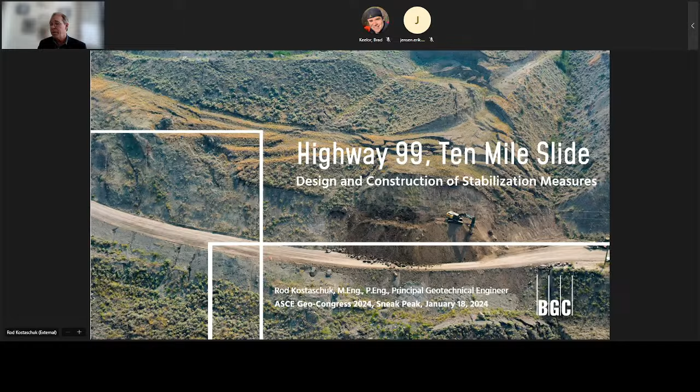Just an outline of what I'll talk about here: some background on the slide and the site, what we did for investigation and geotechnical assessments, then a little bit on the concept selection phase, why we chose the concepts we did, some details on the design and analyses done for the measures, and then the fun stuff - construction, some good photos and graphics to look at, and then results, basically as measured by geotechnical instrumentation.

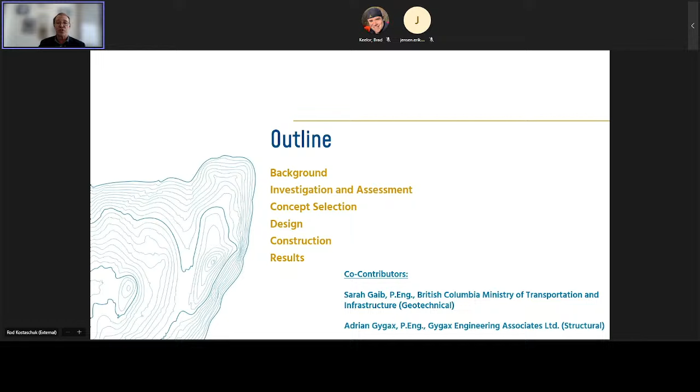Okay, so project location now. On the left-hand side, you see most of our beautiful continent. The red dot is the project location there in the province of British Columbia, southwest corner, Canada. And in the extreme southwest corner, not shown on the map, that's where you'll be for Geo-Congress coming up. A little bit closer view on the right-hand side here. You can see, I'll point to Vancouver down here on the coast, and it's about a 4-hour drive inland to the town of Lillooet, which is close to where the slide is.

On the map, you can see that from Lillooet, the most direct connection to the interior, to the city of Kamloops, which is the regional center with hospitals and all that stuff, is through Highway 99, where the slide is located.

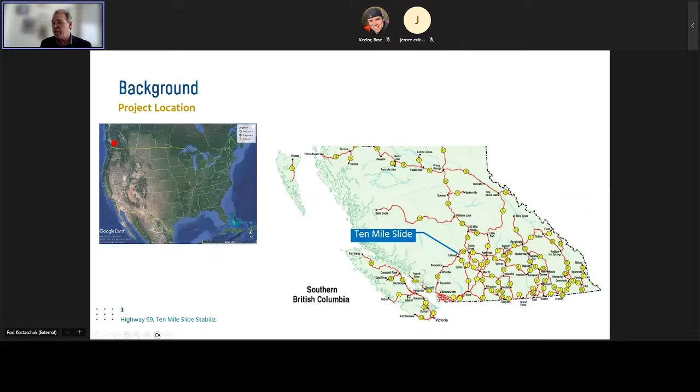Okay, so a bit more on the background. This picture on the right-hand side shows first of all the tunnel earthflow outlined in the purple line, which is a 1.5 kilometer long and approximately 13 million cubic meter earth flow. Essentially, as the mountaintops degrade in this area and the material is weathered and altered, it falls down the slopes, forming this very long soil glacier, fairly steep, moving very, very little, but it has that shape.

Down near the bottom of it, right at the bottom is the Fraser River, which you'll see better in other pictures. The blue line is Highway 99, and above that, the dashed line is the CN Rail line. Both go through this red outline showing the extent of the active 10-mile slide. That slide is about 200 meters wide, about 1 million cubic meters of earth. It's located on Xaxli'p First Nation territory, just east of Lillooet. The basal shear zone, the bottom of the sliding mass, is around 18 meters on average at the highway.

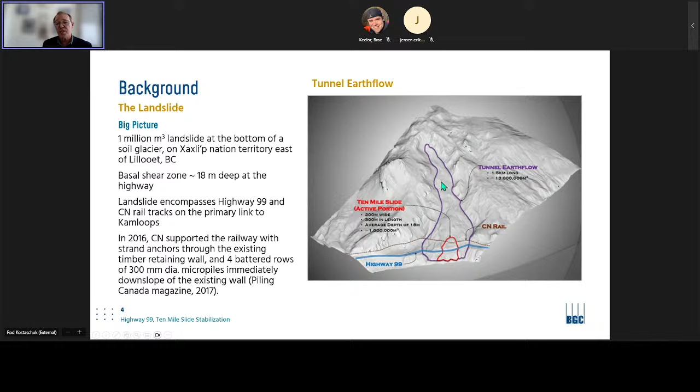This is basically the picture that was at the beginning. Here is a photo from 2015 of the highway - you can see it's a dirt road highway. In the left middle you can see some large tension cracks and movement. The excavator is working to remove material pushed out over the highway during one of the highway closures, working to both widen the road and straighten it out so traffic can resume. In this picture, the highway is closed and traffic is being diverted the long way. At the top right, you can see the timber retaining wall, where the stabilization measures by CN were constructed.

So the slope is above the Fraser River, quite a steep slope. The slide's been active since 1988, and it moves all the time - 5 to 25 millimeters every day - slowing down during dry periods and moving faster during precipitation events or snowmelt events.

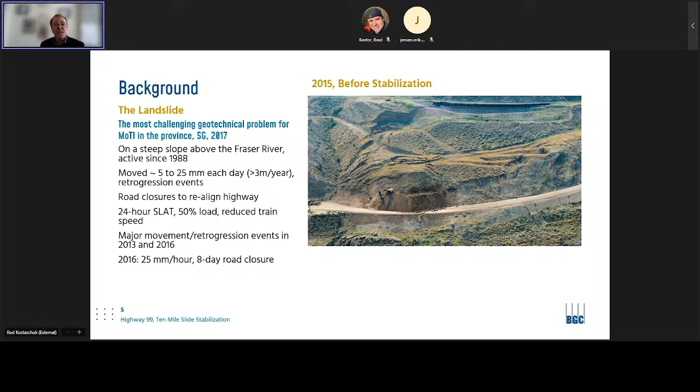There have been road closures to realign the highway a few times over the period it's been active. In recent years, that's caused single lane alternating traffic only to be allowed on the highway, and trains have had to slow down. The most recent major retrogression events were in 2013 and 2016, and in 2016 there was an 8-day road closure. So yeah, in fact, things are so bad in Lillooet, even the highway leaving town is leaving town.

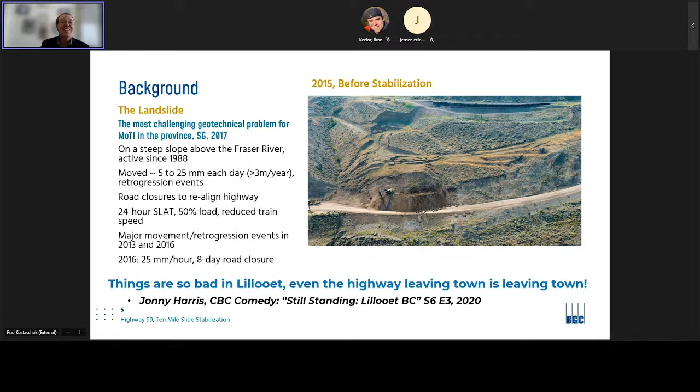How fast has the landslide been leaving town? This is a good illustration here on the right-hand side. In 1984, you have this very small scarp appeared down the slope—the yellow outline is the active slide, Fraser River down here, down slope on the right. It retrogressed upslope 4 years later to get very close to the highway, then continued to retrogress, with the slide getting progressively wider as well, moving up the slope in 90, 96, 2007, 2009, 2015.

These red lines are largely based on LiDAR change detection assessment, trying to indicate all the ground that's moving at the time of the LiDAR shots. You can also see on this illustration a number of geotechnical boreholes. On the highway, these little orange rectangles are cutter soil mixing shear panels that were attempted in 2011—I'll talk more about that in a bit. And the vectors you see are the movement direction for the slide, moving downslope.

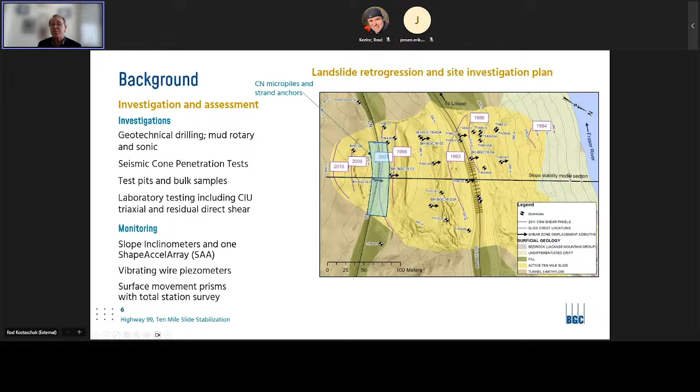What did the investigation and assessment of the slide determine? We have this tunnel earthflow, this kind of soil glacier feature. It's low plastic, firm to stiff, well-graded clay, silt, sand and gravel, but also has cobbles and boulders, up to 5 meters in diameter. But these materials, the boulders and things, are not very durable—it's highly decomposed and altered and weathered rock in this earth flow, so those large particles were actually quite soft.

In contrast, below the earth flow are what we call the undifferentiated glacial sediments, essentially the very coarse river deposits created by the Fraser River, a very large river. That material was dense to very dense, well-graded sand and gravel, but also with significant content of cobbles and boulders, and these materials were very hard—granodiorite type materials, hard boulders. Across the site we could see that material had some quite sandy zones, but then again some very cobbly and bouldery zones, kind of as you'd expect in a dynamic river environment.

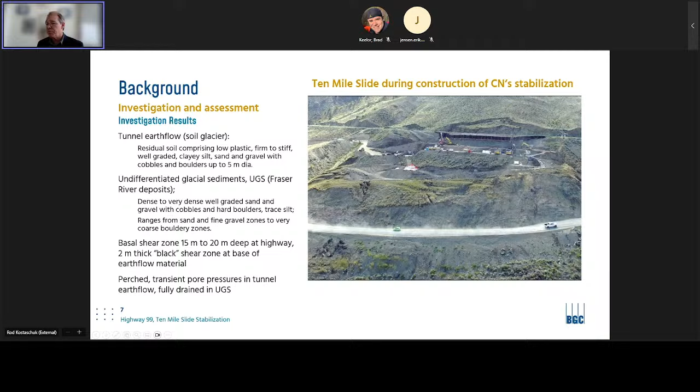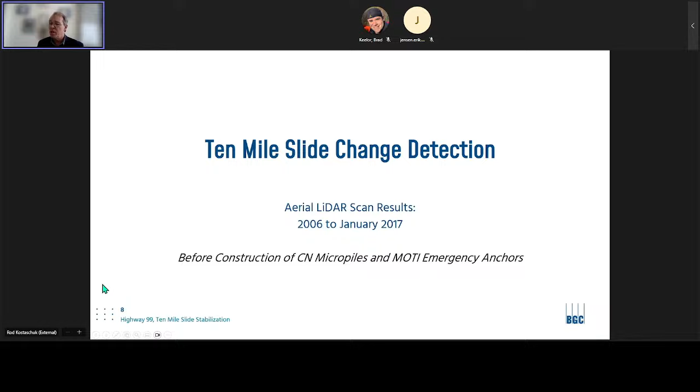Okay, so now to get a better idea what this thing looks like, we're going to look at some change detection analysis using aerial LiDAR scan results for an 11-year period prior to starting any of the stabilization works. This first picture shows the extent of the aerial LiDAR coverage, really the entire earth flow. You can see these lineations going up the earth flow to the top, to the source zone in the andesitic rocks, all this decomposing material. It's very steep, it falls down the slopes and accumulates in this gully.

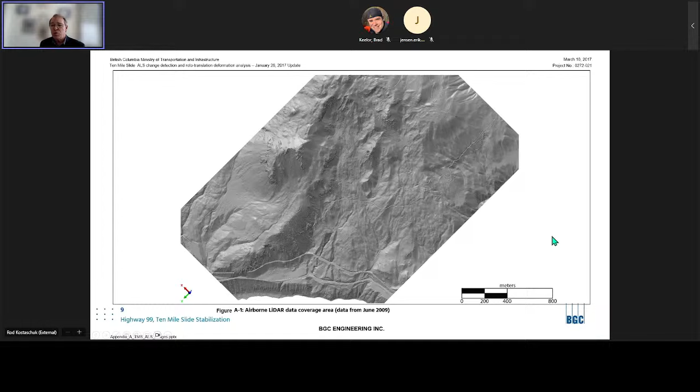Flowing down towards the CN Railway at the top, the highway below it, and right at the bottom, the Fraser River. The next pictures show an animation of LiDAR change detection. What we're seeing here is showing the change in the ground in the period between 2006 and 2009. The color coding here: blue is negative change, meaning the ground has dropped down or moved backwards from the view. A positive change in red is where the ground has bulged outwards or moved upwards in elevation.

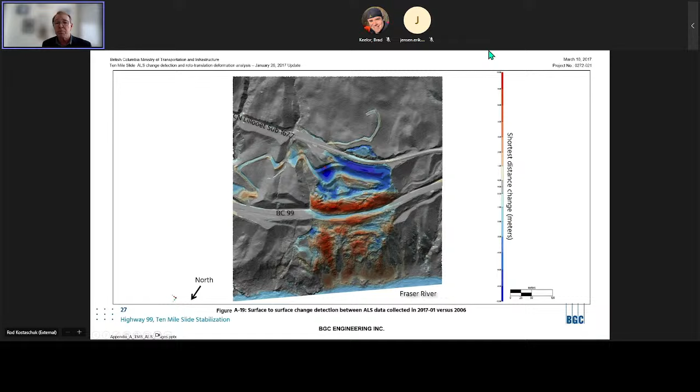Okay, so moving on, the picture on the right here is just a frontal view of the stabilization works at the end of construction. We'll talk a lot more about that coming up, but you can see in the picture the timber retaining wall of the highway and the headscarp well above it, and then the stabilization measures here with the hydro seeding.

So concept selection—what was feasible at this site? Of course you're trying to look for earthwork solutions, but that was not good; it's quite steep, unsafe downslope. You saw the material suddenly kind of slumping off into the Fraser River there. So constructing shear keys or a toe buttress is very challenging. Again, uphill of the slide, the earth flow continues upslope at a fairly steep angle.

Opportunities for unloading the crest are not good. And because there's not a lot of groundwater pressure, just some perched water tables, drainage measures aren't going to do a lot of good either. The site—you can kind of tell from the vegetation—is in a semi-desert climate, in the rain shadow of the coast mountains, so it's quite a dry site. And the undifferentiated glacial sediments are very free draining, so they drain the entire site.

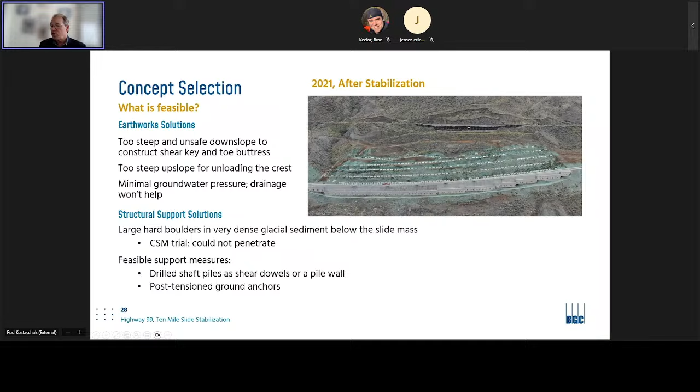So then the feasible support measures that were deemed possibilities were drilled shaft piles, either acting as shear dowels in a passive shear dowel type support, or as a pile wall. And the other measure found to be quite effective and good for this project was post-tension ground anchors. So that's how we got to the concepts we did.

Just a quick look at design criteria here—we wanted to improve the factor of safety, the geotechnical factor of safety for the landslide, by approximately 20%.

That target was based essentially on a lot of experience in the past, a lot of publications. You can improve the factor of safety by that much and really get to a state where you're not going to see much movement. And that's really the basis for that criteria - a minimum service life of 30 years.

If the slide were to continue to retrogress, the current measures wouldn't be enough. So there's a consideration that the design life may be based on landslide retrogression. The structure should be good for up to 75 years.

Limit States design methodology was used. We followed the Canadian Highway Bridge Design Code for our design criteria for retaining walls, including the 475-year earthquake. We also designed for the eventual, inevitable loss of all the soil above those dense glacial sediments.

Downhill of the pile wall, there was no reason to believe that things wouldn't just continue to move. So we designed for that.

But one of the biggest challenges, as I mentioned earlier, was that the ground is moving all the time. There's really no day where it doesn't move at least a little bit.

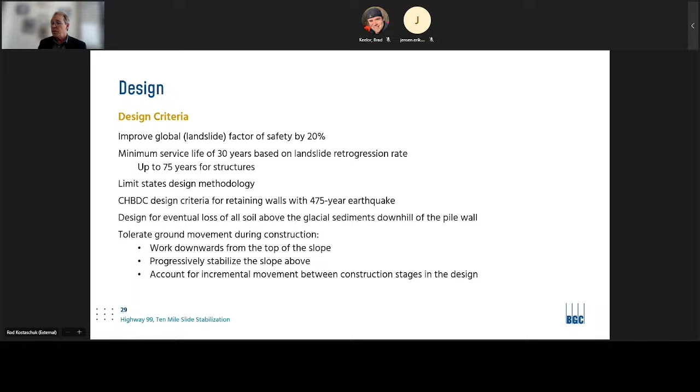So what does it look like? There's a typical cross section here on the right, and you can see the yellowy material - that's the tunnel Earthflow. The shear zone is highlighted in gray, approximately 2 meters thick. At the bottom of the geologic cross section are the undifferentiated glacial sediments, shown with the cobbly, bouldery symbol. Up at the top of the picture, you can see the CN rail line right at the top of the section.

We start at the top, quite close to where CN built their stabilization measures, and start building rows of anchors. From the top down, we ended up with 5 rows of anchors, each requiring a little bit of excavation to build the temporary working platform as we came down the slope, getting down to existing highway grade with the lowest row of anchors essentially at the final highway grade.

Once all that's in place, we went ahead and constructed the pile wall down here - piles first, followed by the anchors, and finally the pile cap and retaining wall built on top of the piles. Then finally the backfill is placed behind all of that.

There's also shown in white here a temporary expanded polystyrene fill wall. You can see the shape of it there, vertical on the front side, and that was built for a temporary traffic detour. So traffic was up there, driving on a single lane, but down here on top of the yellow material was the working platform for the piles on the downhill side of that EPS.

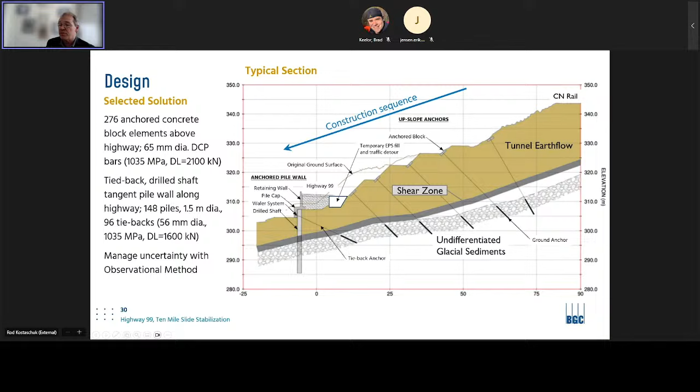So to tolerate the ground movement during construction, how did we go about doing that? Upslope of the highway, those anchored blocks are pretty easy - the anchor heads have grease-filled caps, so these anchors can be readjusted.

They can be tensioned higher, or back off the load on them, whatever you need to do. We have 5 or 6 load cells on each row of anchors to see how things are going and make decisions on whether we need to adjust anything.

And that is sandwiched in a triplet configuration between two concrete piles. These do not have a permanent steel shell. They use temporary steel casing to construct the pile that is removed.

And then, as I mentioned, 2 out of 3 piles have a tieback anchor. Those go through the concrete piles, not through the steel shell. And then a beam is constructed over the top, initially a steel waler, and eventually a concrete beam to tie

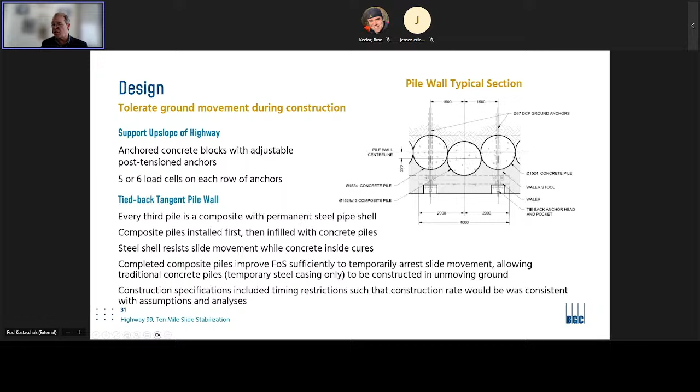Essentially, we started out by back analyzing the landslide prior to any construction work, as well as some local cut slopes, to calibrate our material parameters.

And then once we had that sorted out, we were able to incorporate the piles, the forces from the piles and the anchors into the limit equilibrium model. That allowed us to do initial sizing of the piles, anchors, et cetera.

And again, the design objective was to improve the static factor of safety by approximately 20% above the existing factor of safety. For seismic loading, we also did pseudostatic analysis to confirm that our resulting pseudostatic factor of safety was acceptable.

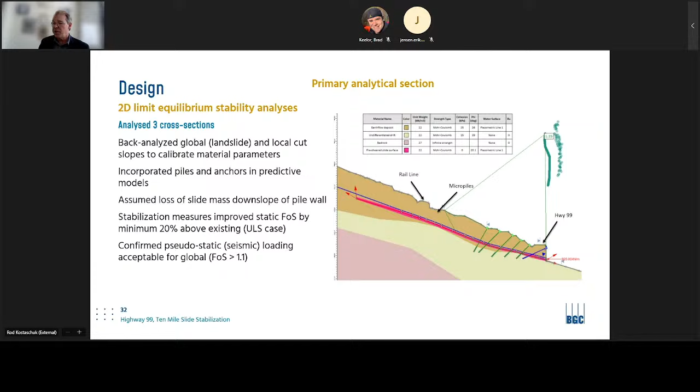But with a simplified limit equilibrium approach, it's really difficult to determine what will be the relative distribution of all of these ground earth loads on the structures.

They're not all built at the same time. The ground is moving while you're constructing. So hence we developed a full 2D numerical model to evaluate the construction sequence, as well as the final configuration under static and seismic loading.

And while that's going on, it's a dynamic model, and you're keeping the ground moving such that if it takes, for example, 2 months to build a row of anchors, then before you build the next row of anchors in the model, you allow the ground to move the equivalent of 2 months of ground movement, and then you build the next row of anchors.

So that's the displacement control model. We had to reduce the strength a little bit of the basal shear zone here sometimes, just to keep things moving, tiny little amounts, just to keep it moving in the dynamic model.

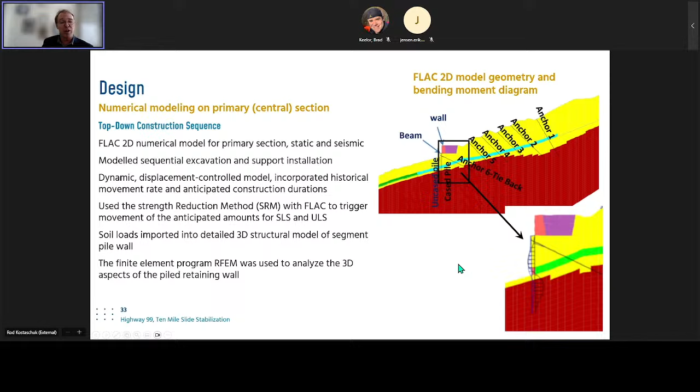We start with the construction sequence I described. You install anchor row 1 and then tension it off, allowing some subsequent slight movement, then move to row 2 and do the same, continuing down the rows all the way to the highway.

At step 16 in the model, you install the composite steel pile shell—only the shell, so at this point it's the structural properties of just the steel pipe. Then you slowly increase the stiffness to account for the hardening of the concrete inside the pile; that's step 17. Then the additional concrete piles, the two infilling concrete piles between each pair of composites, are built in the model.

During this stage, the ground downhill of the piles continues to move in the model, but it stops moving at the pile wall and above.

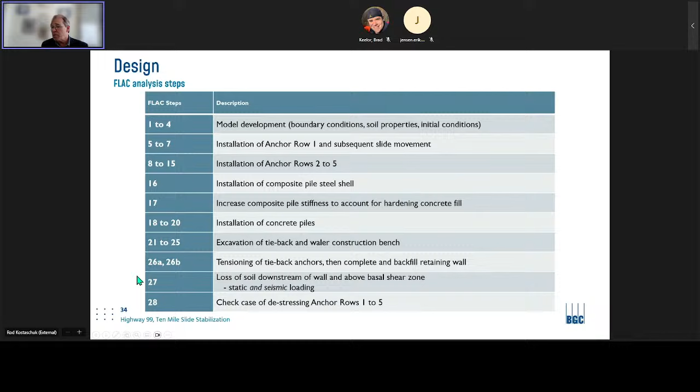I'm going to skip through this a little bit.

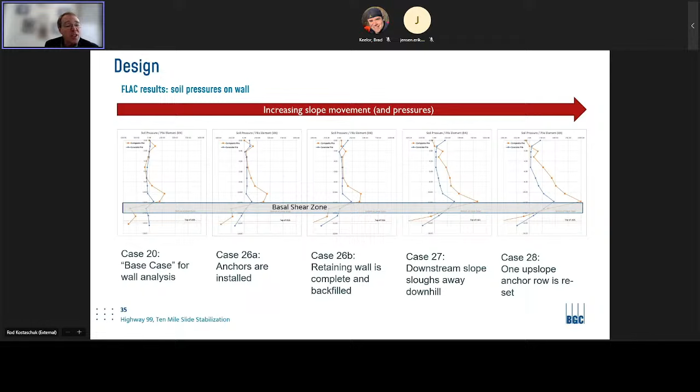Model A has the piles installed acting just as a cantilever. In Model B, a steel waler is installed along with the anchors. Finally, in the ultimate case, we build the retaining wall on top of the piles, construct the concrete cap beam, and backfill behind the retaining wall. That's the case where we also look at the effect of detensioning the uphill anchors, seismic loading, and loss of soil downhill of the wall.

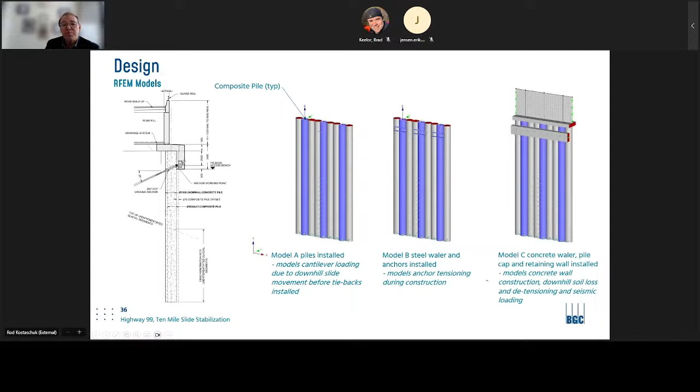There's a bit of a change in how the loads are applied—again, a detail here: FLAC and RFEM modeled the anchors in a slightly different way, but although they're equivalent models, the 3D structural model obviously does a much better job on the bending moments, shear forces, etc.

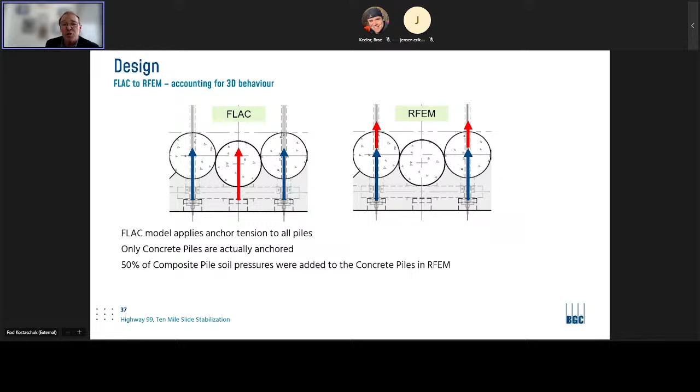It showed us that unloading the anchors uphill of the pile wall is not the greatest idea, because it puts a lot of load on the pile wall if you do that.

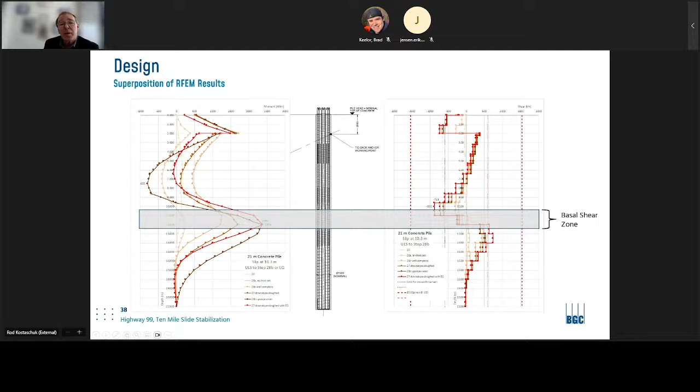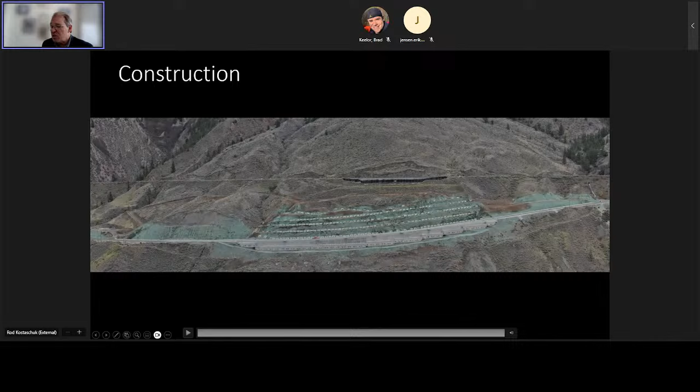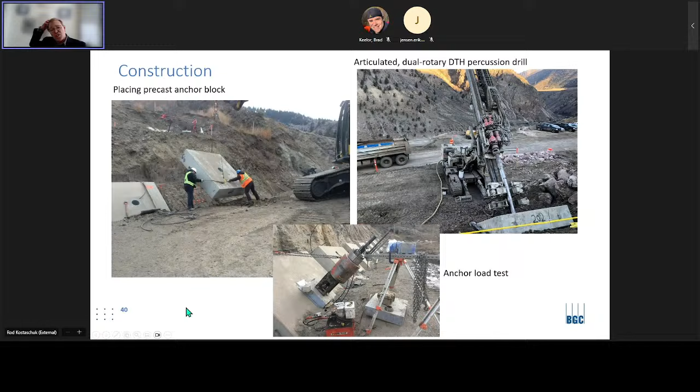Okay, so just a few more neat photos of construction. Here we are on the left, placing the precast concrete anchor block with the hole through it. Then the next step, the articulated drill on the right, is drilling through that to install the soil anchors. And on the bottom here, we are load testing. Every anchor was tested and then locked off.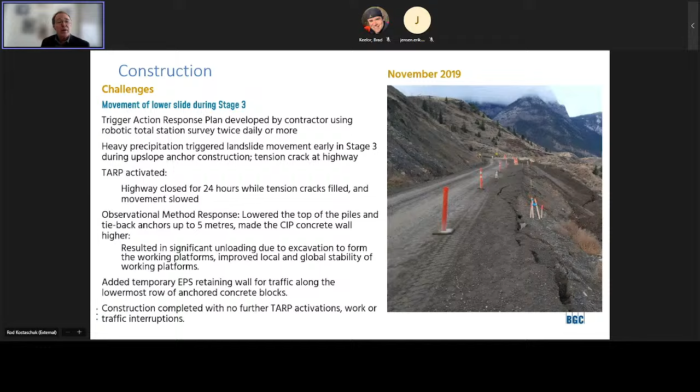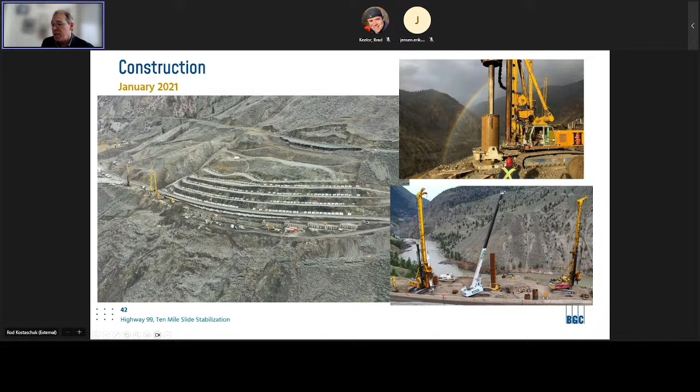There's the anchors being installed through the piles. The top picture on the right here, you've got your anchor installed, and then they put in this waler stools onto the concrete piles. And then we're tensioning them off here at the bottom.

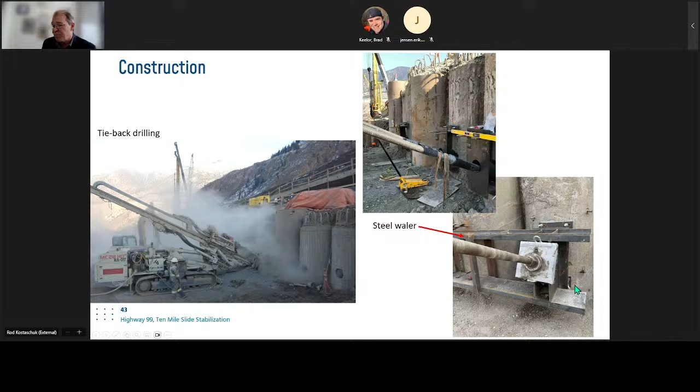Okay, that's what it looks like just before we start pouring concrete. There's a temporary steel waler. The anchors are tested and loaded off using that. And then all of this is encased in an integral cap beam and concrete retaining wall, so once those tiebacks are tensioned, the slide is completely stabilized, and now you can carry on with the rest of the work. Ground's only moving down here on this tieback working platform.

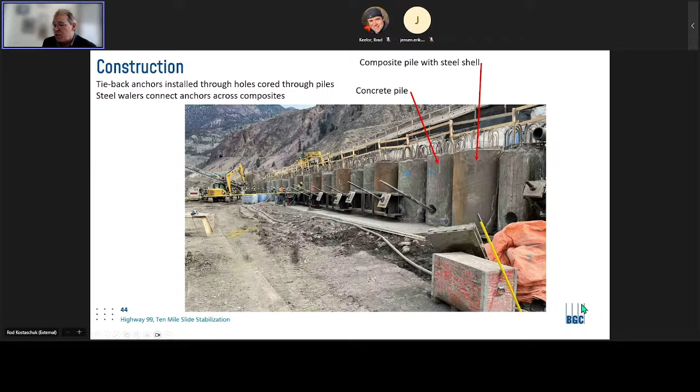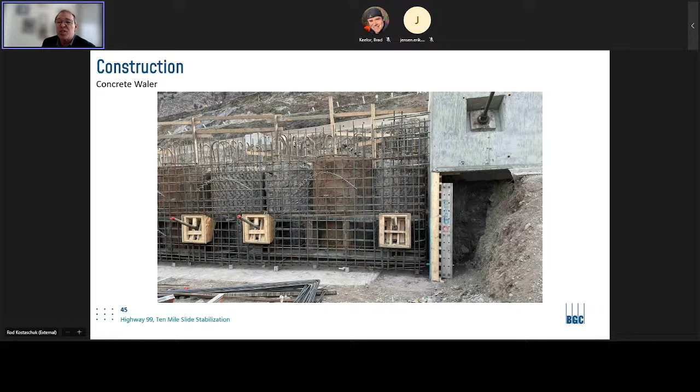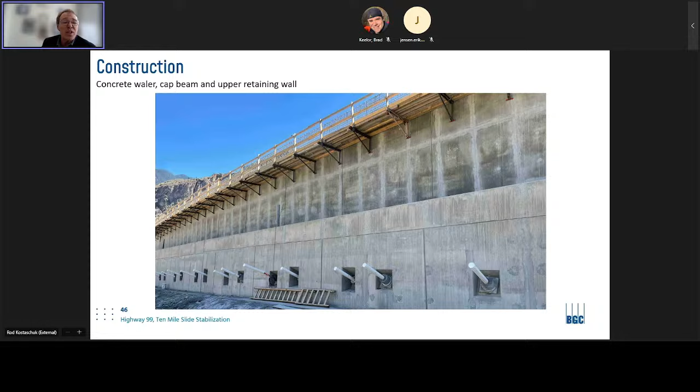So the TARP monitoring continued throughout that construction. A little bit of rebar detailing, blockouts for the anchors prior to casting that concrete. On the top right of that photo, you can see the completed concrete work, and that's the permanent cap beam. There is the retaining wall, and on top of that, they're just doing the rebar for the guardrail on the highway.

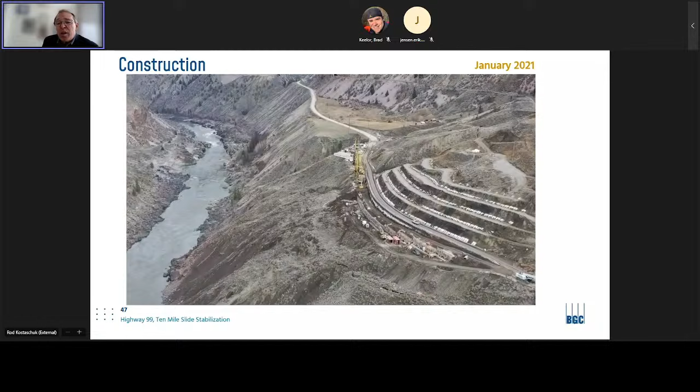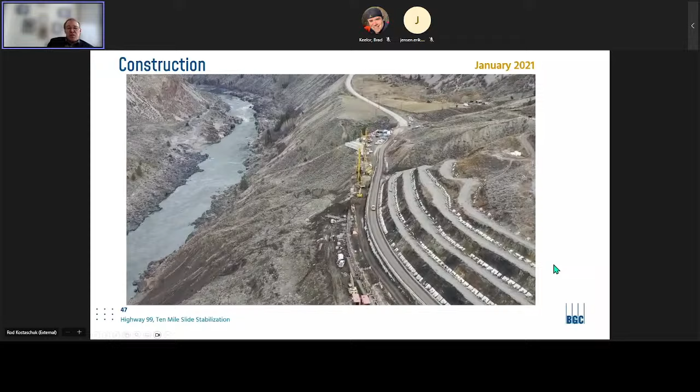So yeah, near to the end of construction. At this point, the slide is essentially fully stabilized from the pile wall up. Okay, so just a little bit more. There's a photo near completion. You can see here they're removing the expanded polystyrene fill. Traffic has been diverted on the downhill side of that, right up against the top of the retaining wall that is completed here.

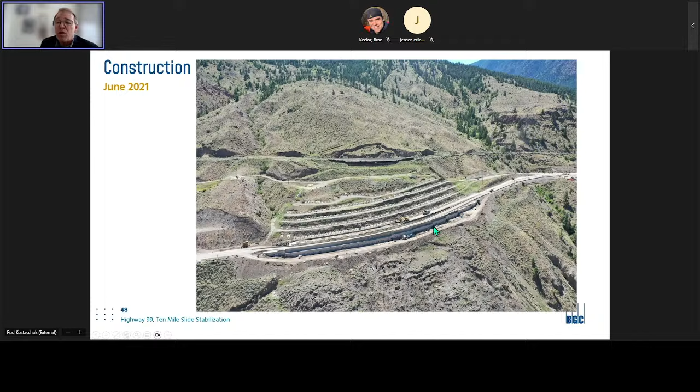And just some results. I mentioned that there was a bit of a delay during construction, and there was. We initially, in phase one, installed 30 anchored blocks on the top row, but then as we were preparing for the rest of the work, it was determined that the soils, those earth flow soils, actually had high naturally occurring metal content. So you couldn't just dispose of them any old place, and they had to get a soil disposal area designed and permitted before we could carry on with the rest of the work, which involved removing the soils off site. So we ended up with a 2-year unanticipated break in construction.

So this plot on the left here is the load in the anchors on the upper row, that first row. And you can see the load going up, and then we untension it. And it's going up to the design load, and then we untension it again. It's going up because the ground keeps moving. We haven't put in enough anchors to stabilize it, so it just keeps moving. This was not good. Some of these gaps here were only 2 weeks long.

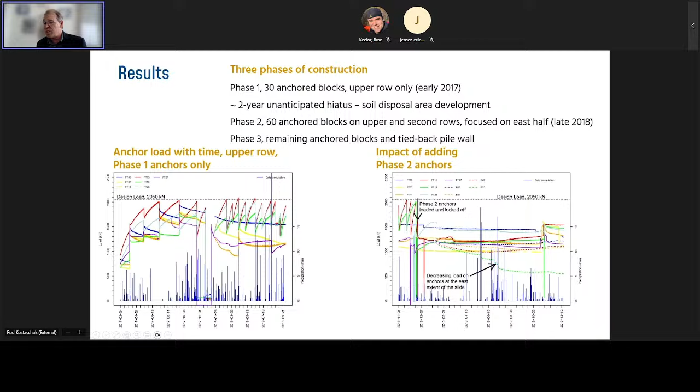But then we got in phase two, which was 60 more anchored blocks in the upper 2 rows. And that was it, that was the ball game. After those anchors were tensioned, we didn't see anchor load increase anymore. It was essentially steady, a little bit of increase. We readjusted anchors from time to time. I'll show you a little bit more on the next slide, but loads continuing fairly steady.

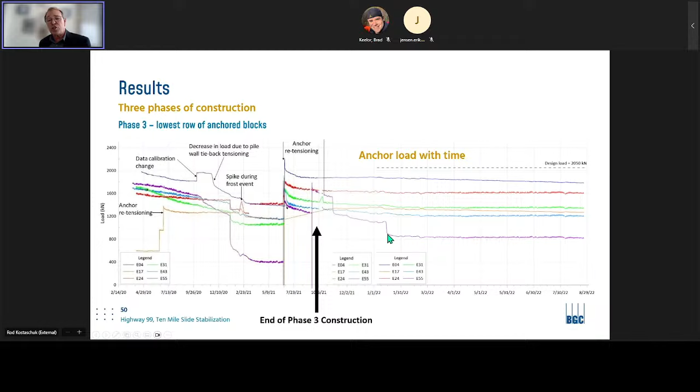These are the loads on the lowest row of anchors with time. Interesting event: when we tightened the tiebacks in the pile wall, the load on the anchors above the highway decreased. You can see this here. The load on the lowest row of anchors actually decreased when the tiebacks were tensioned. And then we retensioned anchors here, you can see in the summer of 2021, and then loads have continued fairly steady for most anchors. This purple line here on the east end, we have anchors located in very cracked up ground, and they continue to settle in kind of these lurches. So that's something we continue to monitor.

Slope inclinometer data showing cumulative displacement with depth. Again, we got up to approximately 25, 30 millimeters in one of the inclinometers. These are located within the rows of anchors on the slope. But then by August of 2022, we're really seeing no more movement in those.

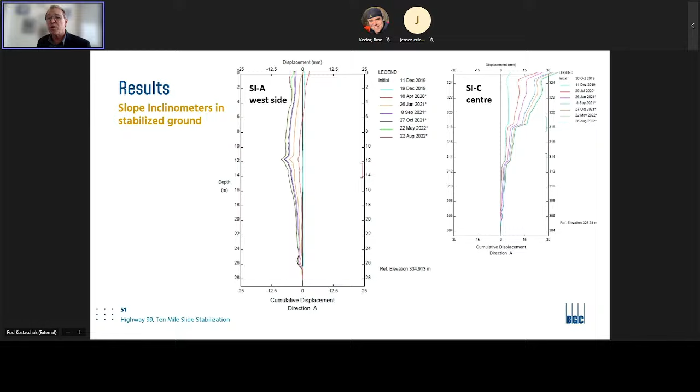We continue to monitor. And this is the LiDAR change detection work that was done using terrestrial scans after construction. And from this, you can see all this gray area is not moving, that's the zero change stuff. But down below, we continue to see this movement and material slumping into the river.

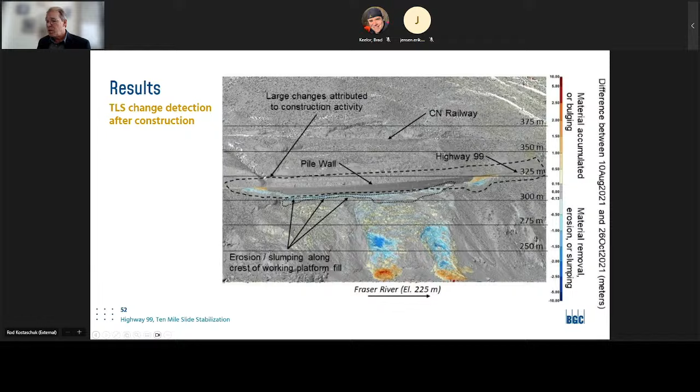So again, monitoring results. Load is fairly constant over most of the anchored blocks. It's decreasing a bit at the east edge of the slide. The load on the tiebacks is beginning to slowly increase, as we expect, as ground moves away from the face of the wall. But within the stabilized area, we've got negligible movement.

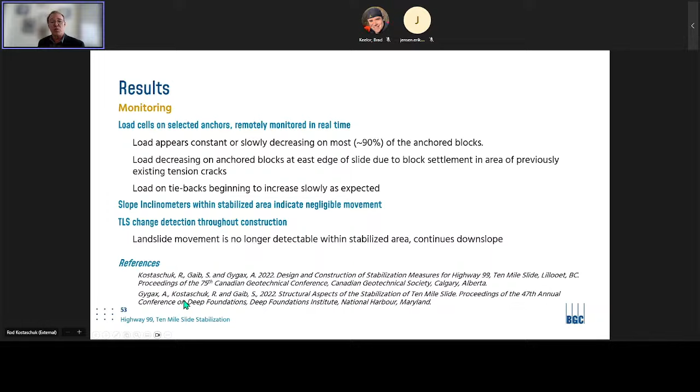There's a couple of references for publications on the project, if you're looking for more details. The first is the geotechnical presentation, and the second is the structural aspects of the work. As of October of this year, or last year I guess now, you can see that the ground is still moving downhill of the pile wall, and that continues to slough away into the Fraser River.

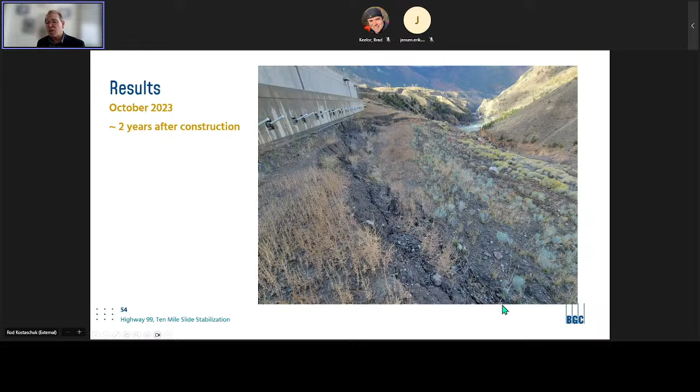Thank you, Rod. I think my mic is working again. Okay, yeah, thank you, Rod. Fascinating stuff there. As a person who has spent a lot of time doing numerical modeling and sitting in the ivory tower, it's always nice to see people doing real engineering and learning about all the flavors of what that looks like.

So anyway, I have a few questions. We're going to get some questions from the audience popping up on my screen right now. But as we're getting those set up, a couple questions from me: was pile integrity testing completed? And if so, what method did you guys use?

Yes, we did do pile integrity testing. What we used was TIP, thermal integrity profiling. In that method, you install thermocouples, a string of them down the rebar cage around the perimeter. Then you monitor temperature with data loggers as the concrete cures, and look for anomalies in that change in temperature. We found it quite effective.